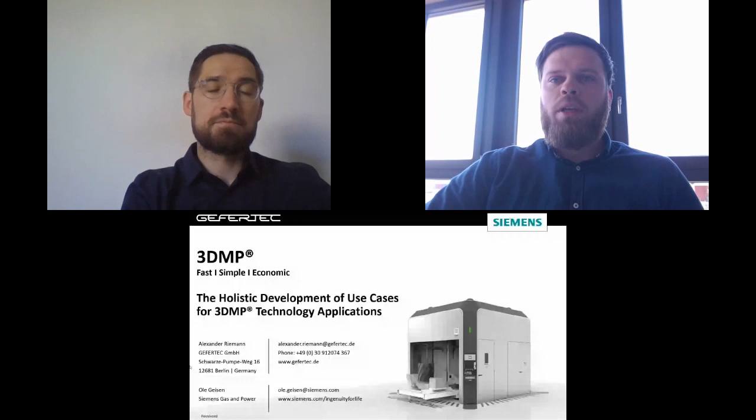All right, I'm going to start. My name is Alex. Thanks for the introduction, and thanks a lot for joining the event today. With me is my co-referent, Ole Geisen, and I will just start with a little overview about our additive manufacturing landscape, so where we're coming from.

Basically what we see in the industry right now when it comes to metal additive manufacturing, we have different processes such as laser or electron beam as a heat source, so beam-based. Coming from beam, you use mainly as a feedstock wire or powder, and one main technology being available for metal additive is laser powder bed fusion.

We as GEFERTEC went a little bit of a different way. We worked on the right-hand side here, so we have an arc-based technology, more precisely gas metal arc welding, and we called the whole thing 3DMP. What does 3DMP mean? For us, 3DMP is 3D metal printing. So we combine our CNC machines with the wire arc additive process, and also with our own CAM software.

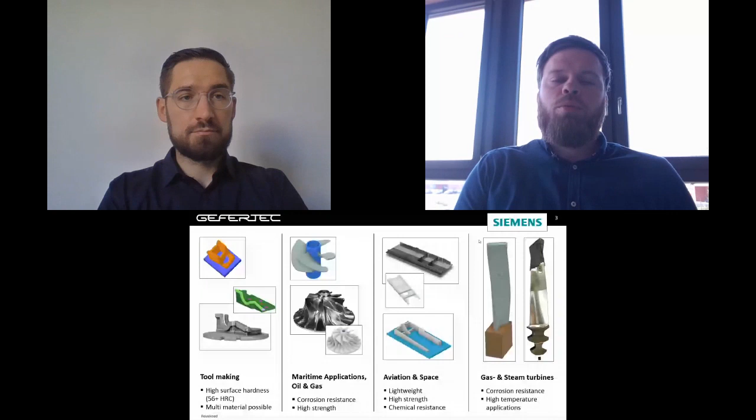This package together enables you to really print parts. On the next slide, I'd like to talk about a couple of applications we have run through the last couple of years, and our kind of main industries or applications we could find so far.

One of them being tool manufacturing, such as repairs or even building up a full tool. The main advantage we see here is that you can use different materials to build up one part. We use, as I said, a wire as feedstock, so it's easy to change, and you can use two or more different materials within one part.

The advantage here is that you're actually able, in this case, to have a pretty ductile body, and then maybe combine this with a really hard surface, which you need for such applications. So you really have the properties in the part where you need them, and you only apply the material where you actually need it. This also reduces production cost or lead time, and of course you don't need a full big hard chunk of metal—you just need to machine the hard material where you need it.

Another area of application we are working in is those propellers or impellers you can see here. Propellers being more used, obviously, in maritime applications.

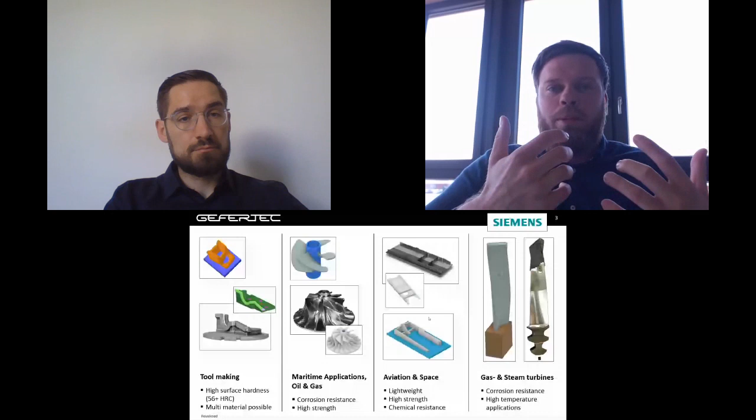With titanium it's very complicated, because recycling of the chips is pretty expensive, and the material itself is pretty expensive, so parts end up expensive too. Here again there's a possibility to reduce cost and build up lightweight, high strength structures.

The last use case I'd like to talk about is gas and steam turbines—you can see those blades here. We're working in these applications too, because machining and forgings are the standard production methods, and for blades of different sizes, which fit well in our machines, it's possible to substitute the manufacturing method with 3DMP.

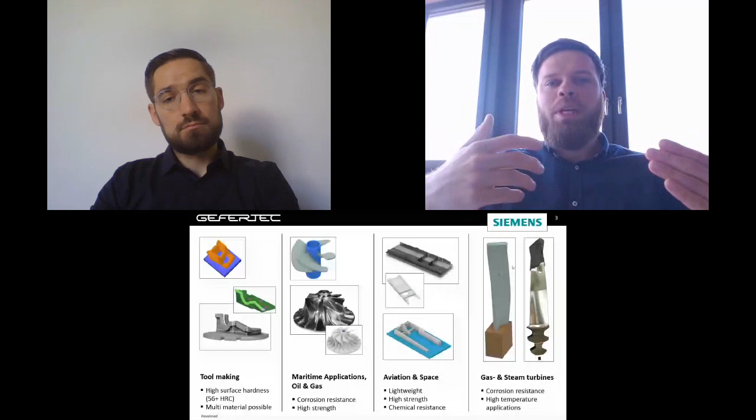Here we are also working on high alloyed stainless steels, as well as nickel-based alloys, for example. Mainly with 3DMP, for the implementation of such technology, we are looking for simple or medium complexity parts with more or less expensive materials and/or high machining requirements.

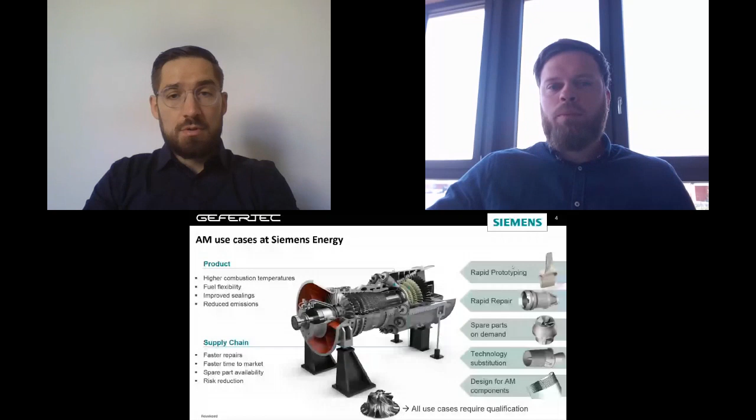Yes. Good, so let's start with use cases for additive in general at Siemens Energy. One thing I wanted to start with is one of our main products, one of our main drivers for additive today, and somehow the reason why we've been early adopters of additive: the gas turbine—you see it here.

It's a product competing in a market that's slowing down a little bit, so you've got to really push new technologies if you want to survive in that market. It's quite clear—you have to have higher combustion temperatures, better fuel flexibility, things like this that keep requiring better technologies or better solutions.

You also have supply chain issues—challenges, I'd call them—that also drive you towards new technologies, right? Faster repairs, faster time to market, spare part availability. All of these were the main reasons why we went into additive years ago in the first place.

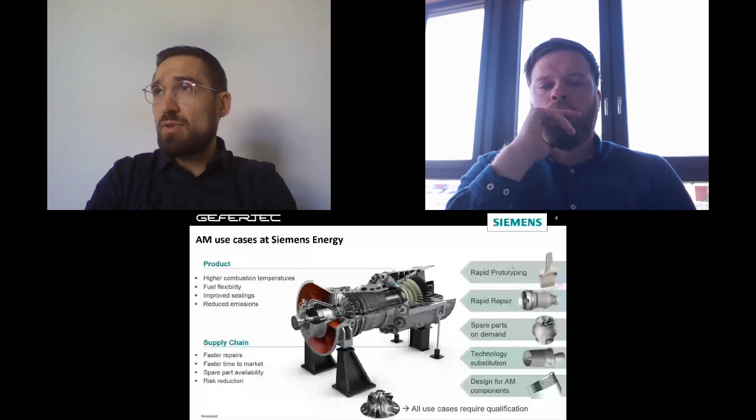The main use cases for us internally, you see here on the right-hand side, starting still with rapid prototyping—still an important use case. This means you use additive to validate a new design. You get real testing data, you confirm your design and idea were good, then go back into conventional manufacturing, usually for large serial production where casting might be more economic. These are still cases where we use AM today for fast technology validation, which makes a lot of sense for us.

The second one is rapid repair. That's usually taking a component that's been in service, cutting off a piece that's been damaged, and then printing on top, right? This is something that has been done and developed years ago and has been optimized over the years.

Spare parts on demand, very important topic. So for engines that are 30 years old and where we still need to provide spare parts, it makes a lot of sense to check additive. This could add a lot of value.

Technology substitution, difficult one. Usually this is to reduce cost. Sometimes you can use a certain additive technology, just like 3DMP, for example, and be more economic than what you had before. These cases, you don't find them that many or that often, but they exist, and it makes sense to look for those.

And then last but not least, design for AM components, where you completely change the entire design setup to get the best performance out of your part.

Important point is we've been doing this all for the gas turbines and for other Siemens Energy products, but lately we've been pushing quite hard to bring our services into different industries. We've been covering oil and gas, aerospace, and so on. So a lot of the things that we developed in-house now serve as a basis for services we also provide externally.

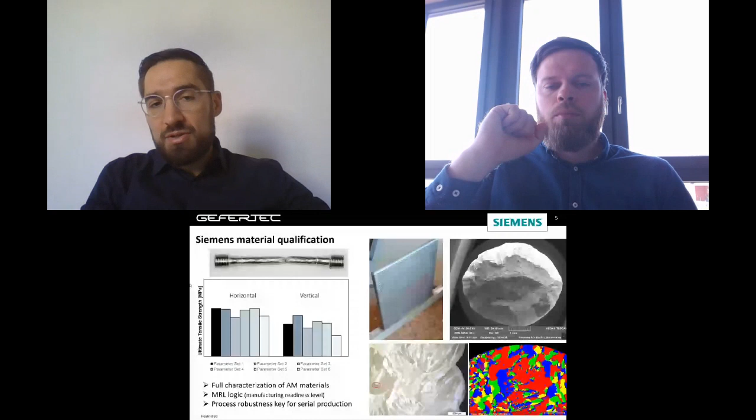Because remember, and Alex has shown it, these are critical components sometimes. A blade, you cannot just print a blade and hope it's gonna hold in the engine. All this stuff needs to be done the right way, and this is where we see a lot of potential, also working with GEFERTEC directly to make sure we have a very robust process that is usable for customer parts.

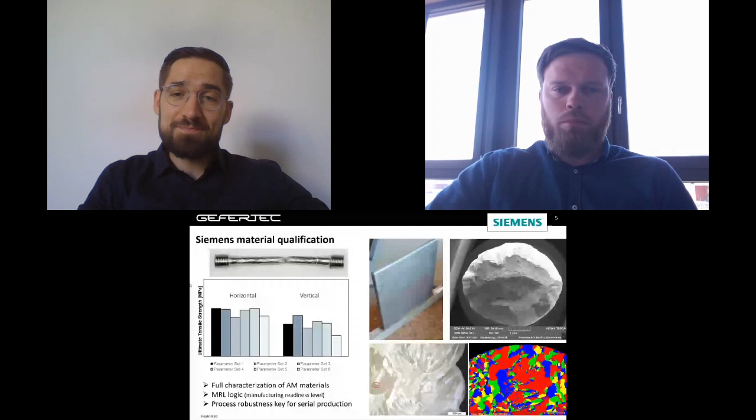Having done all this qualification processes, and all this talk about having stable process parameters and things like that, now it becomes really necessary to keep track of these parameters and make sure that they stay in a range and will always be stable throughout the whole printing process, or even throughout the production of many parts. So therefore, we have developed our own hardware and software components.

We are also looking at all the main parameters, and this is pretty easy to do, or let's say more easy to do compared to other processes. We have a welding process which is all based on the wire feed rate and on the wire actually creating the arc, and through that we are melting the material. So if we understand the main parameters such as voltage, current, wire feed rate, and gas flow, and monitor them, we can make sure that we stay in a range and see if something goes wrong, if anything falls out of range, or if you need to change consumables.

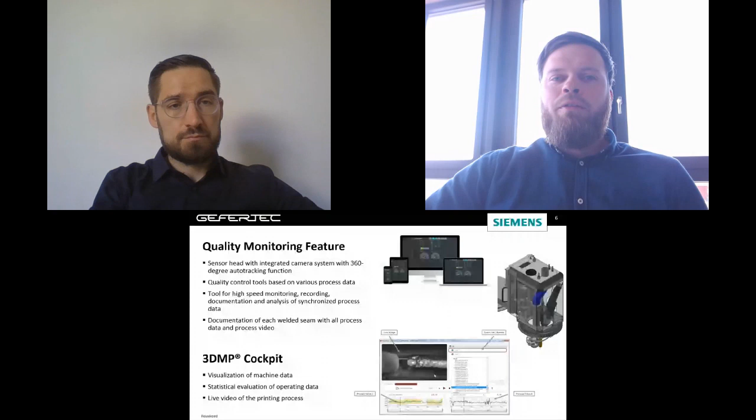Here, I'd like to talk a little bit not only about software, but also about hardware. Mainly we're basically a machine manufacturer, so obviously we also produce and have developed our own machine systems.

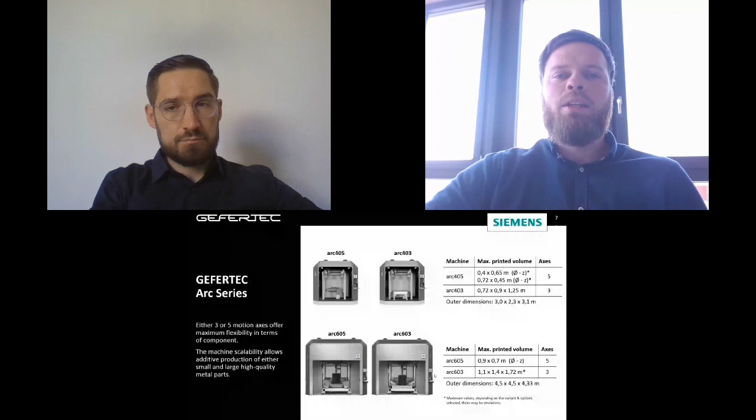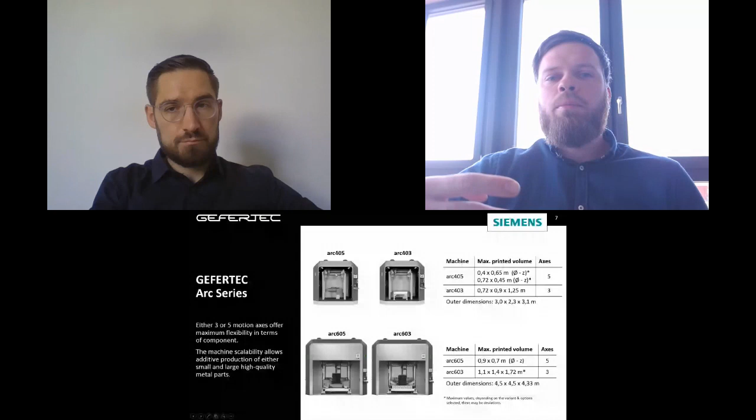You can see here the two machines, basically the two systems we are offering: the 405 on the top, and the 605 on the bottom. Both are available as 5-axis and 3-axis versions, and it really depends on the part complexity. We are really focusing on medium to low complexity parts.

If you want something a little more complex, maybe an impeller or something like that, you can use a 5-axis system to manipulate the part underneath the torch. Or if you're really looking for bigger parts, the 3-axis version is probably the way to go, for heavy parts up to 3 cubic meters in size or up to 3 tons in weight. So you can really have pretty heavy, pretty big parts, even for repairs or things like that.

We are using those systems ourselves as well in our 3DMP application center. For us, in the application center, we want to provide the customer the full experience of this technology, going through the whole process chain, talking about business cases, and helping the customer develop their business cases or use cases for this technology. So we start on the CAD model, really looking at the design of the parts, doing iterations and optimizations of the designs.

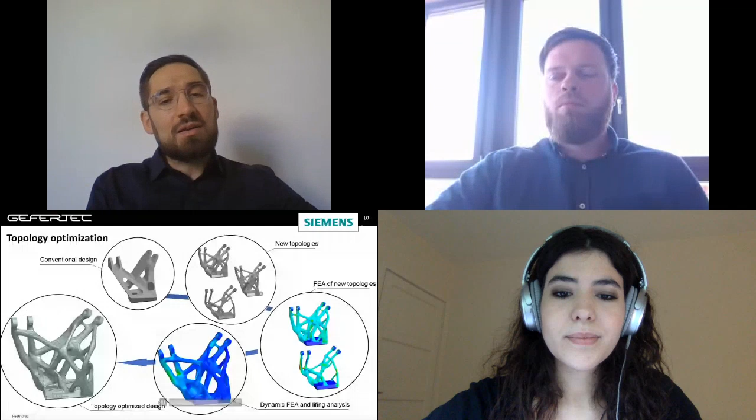We've seen many topology optimizations, many of these pretty bionic shapes. The key thing to keep in mind is if you go through a workflow like this, you have an initial design, maybe a milled part, you get into new topologies, crazy shapes that might be lightweight. You do your FEA for static load and dynamic load. The crucial point is none of this makes sense if you don't understand the materials. You have to characterize first to understand how the material behaves, and how this affects the lifing. If you have certain surface characteristics, you need to respect those when you do your lifing. Just taking properties for a widely available chemistry, like Inconel 625, won't allow you to make a precise simulation. You have to characterize your additive material.

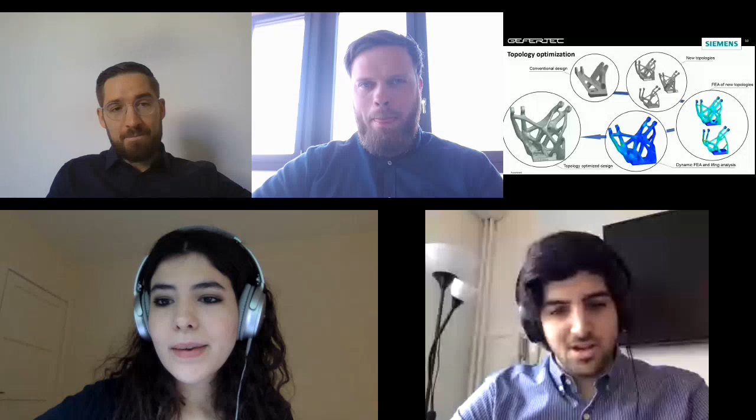Does this answer the question? Hi guys, I think it does. It seems like Carlotta is having some technical problems. For any other questions our audience might have, Alex and Ole, I'm sure you would be more than happy to speak with them during the networking sessions.